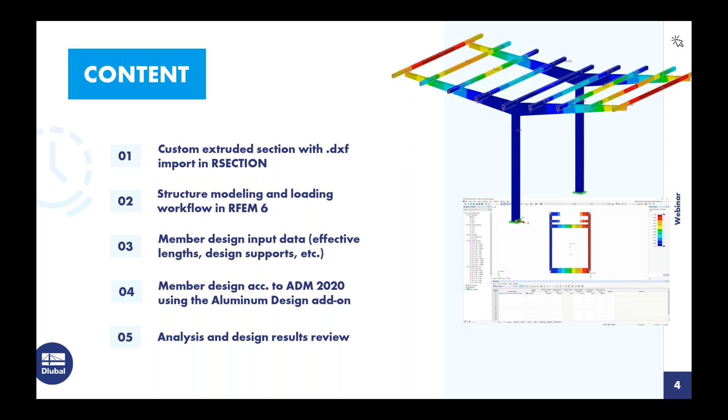We will also utilize the Aluminum Design add-on. This is an add-on that is integrated within the main program RFEM that allows us to perform the design according to the ADM 2020. RFEM will perform the analysis and the add-on will perform the design. Finally, at the end of the example, we'll take a look at both the analysis and design results.

So let us talk about a few new features that we have within RFEM 6 related to aluminum design when we compare this to what we previously offered in RFEM 5. As mentioned, this add-on aluminum design is going to be better integrated in the main program. In RFEM 5, we previously had to open up a dialog box, define information like unbraced lengths. In RFEM 6, we'll see that as we model the members, including the cross-section and the materials, we can also define immediately the effective lengths.

The topic of effective lengths has been completely revamped within this new generation as well. We'll see how we can define intermediate supports so that the effective lengths, or K times L, used for our unbraced lengths is calculated automatically. We've also added what we call design support.

If we take a look at our structure that we'll be modeling today, this carport, we have these small purlin members passing over the main cantilever beams. This is a rather complex situation for checking serviceability or deflections because we have a small cantilever at the left end, the right end, but in between the main beams here, the element is supported at both ends. We'll see how design supports can help us define more complex situations such as this.

Now, the next two bullet points here I will not be showing in today's example, but I think it was worthwhile to point out that we now can consider transverse stiffeners according to section G2 when we are looking at the member shear design. I'll point that out in the example today. Also, single angle bending can now be considered according to the geometric axes if all conditions are fulfilled according to section F5.1. Previously in RFEM 5, we considered single angle bending according to the principal axes only.

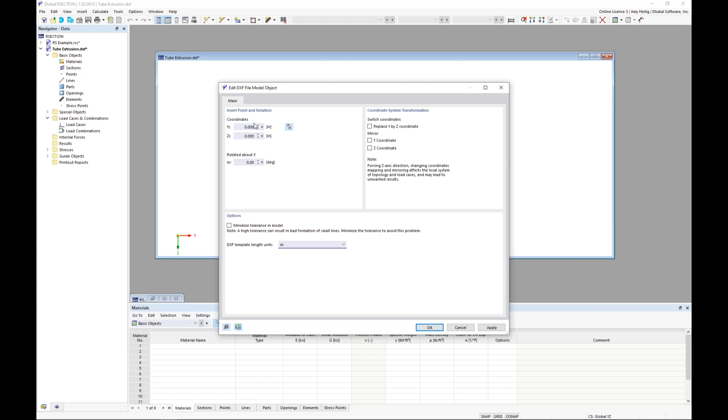We will begin in our standalone program, RSECTION, and I'm going to import a DXF file for my custom extruded section by going to File, Import, DXF. We'll select the DXF file saved to our computer. The program will want to know the units set within that DXF file, so we'll set this to inches. We're going to insert the DXF file at the origin, 0,0. We click OK through the dialog boxes, and we can see the line elements imported.

Now we need to take a couple steps to calculate the cross-section properties of this custom extruded section. I want to right-click on the model name to look at the base data. This is the dialog box that pops up when we create a new model, or in our case with the DXF import, we can revisit it. Notice the analysis method has two options: finite element analysis and thin-walled analysis.

Going back to RSECTION, we'll begin with the finite element analysis in our dropdown, so we click OK. What we want to create is a new part, so we go to our navigator and right-click on parts to create a new part defined by the boundary lines. The initial material needs to be set here - we may have a default material, or we can create a new one. I'll edit this default material by launching my material database.

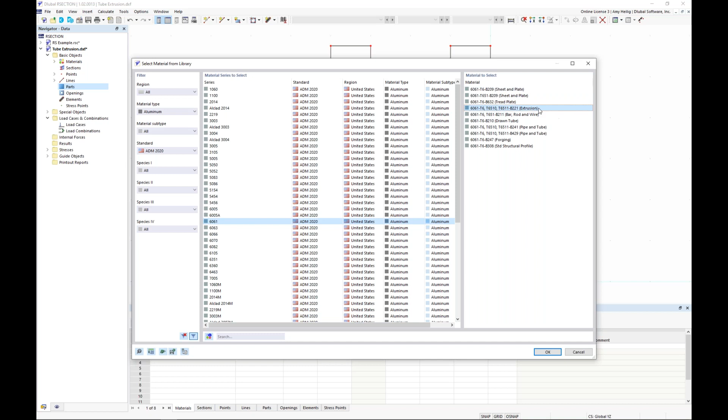On the left, we have filters where I can select aluminum from my dropdown, as well as the ADM 2020. Here are all the aluminum materials directly from the standard, including the 6061 category, and we can see the individual materials listed. For today's example, I'll choose 6061 T6 for extrusions. I click OK, and we see the material properties generated.

In the upper right, I want to use my arrow to highlight all of the boundary lines. Now I'm going to hold down my shift key to deselect the elements in the interior. When I click OK, we'll see our part generated, but of course we need to add in that opening in the center.

So what we'll want to do then is right click under openings to create a new opening. Same concept here where we'll choose our boundary lines. We can drag over those 4 center lines. I click OK, and now we can see our section is generated considering that opening.

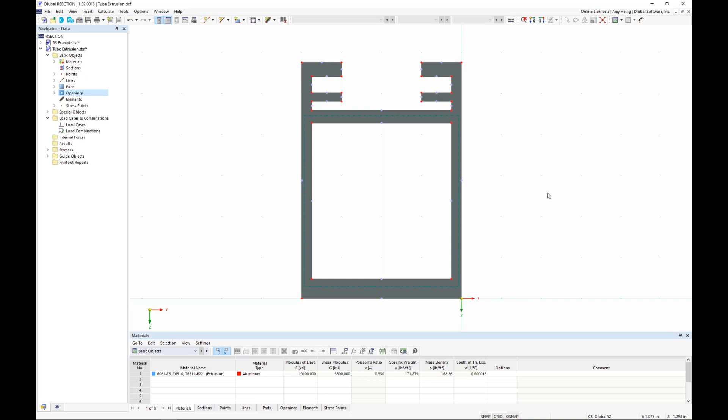And really that's all that needs to be done for this finite element analysis. I can go to calculate all, and the cross-section properties are immediately presented to me in table format here at the bottom. You'll notice that all of these properties can be saved with the model up here in the upper left-hand corner. This is what we would want to bring into RFEM, for example, for this custom extruded section according to the finite element.

Now, we also have some graphical options over on the left. We can also view the unit stresses here based on applied 1 kip load or 1 kip foot moment. So that would, again, be all that's entailed for that finite element analysis.

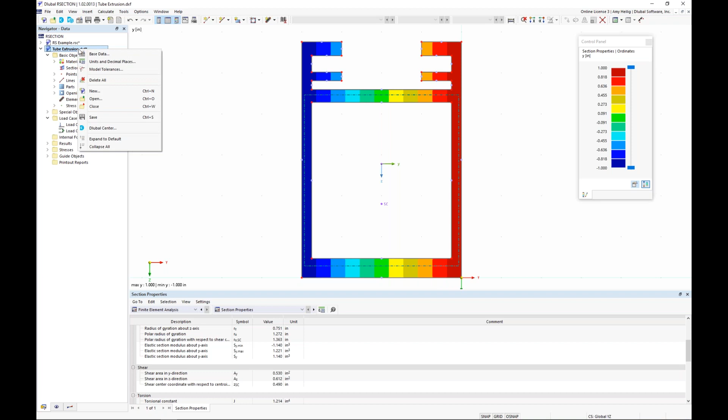But we want to take this a step further to consider local buckling once we do get into RFEM. So what I will do now is right click to go back to the base data and instead change the analysis method to thin wall. I click OK. Now everything you have seen up until this point is still applicable for the thin wall analysis. We have to create the part, we have to create the opening, but we take it a step further.

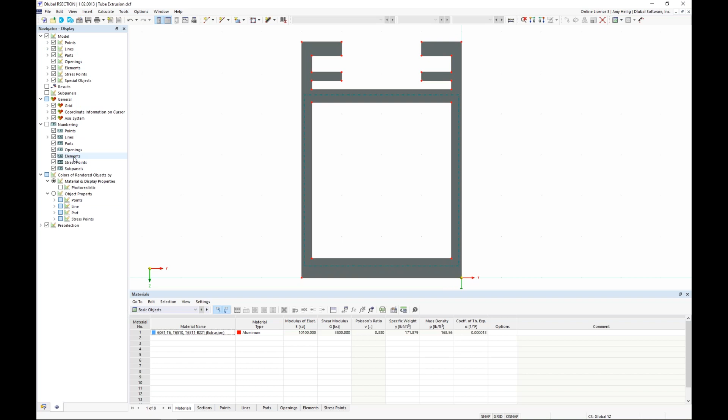By creating our elements. So I'm going to go to my navigator here and turn off my parts, turn off my openings. They still exist, I've just graphically turned them off. In order to create the elements, which will essentially be tracing over this section, what I want to do here is create some additional nodes that will guide me in generating those elements.

So I'll use my tool option up here at the top to create a new node between 2 existing points. I'm going to turn on this option here to set the node type to standard. This allows me just to click 2 nodes. I click apply and we see the 3rd node generated. And I'm going to do this at various points throughout this cross section.

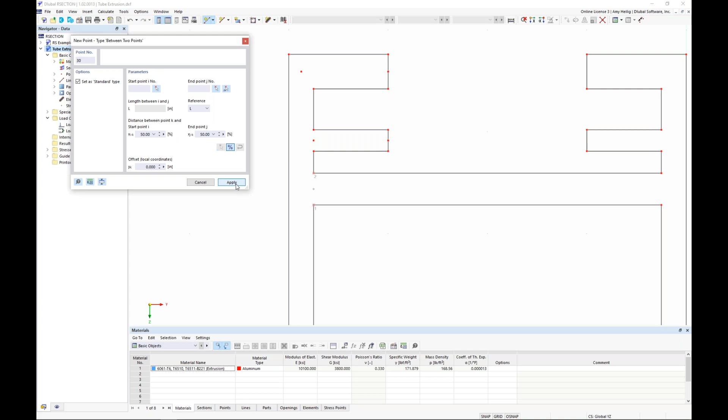Again, these are going to help me define my elements with the start and end node locations. We'll do so at this 3rd horizontal location as well as on the right side here, clicking my first point, my second point, and finally we have a couple points down here at the lower left that we would also like to generate.

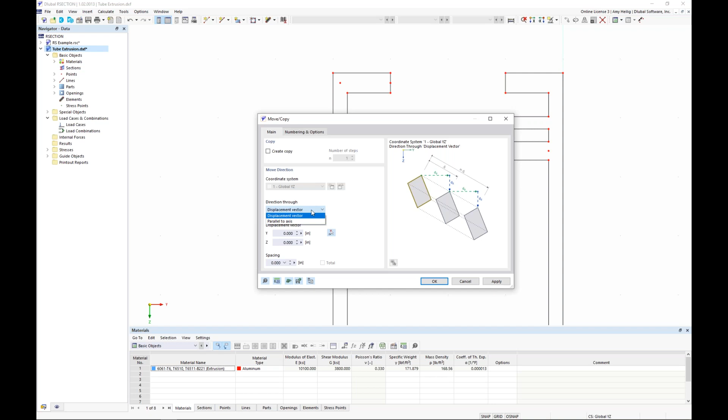Once we have completed the generation of the nodes, notice I'm not creating these same nodes on the right-hand side. We'll be able to mirror our elements from the left to the right-hand side to save us a bit of time. I'm going to hold down my control key to select both of these center nodes and use my move copy tool.

For this, I'm going to set the displacement direction parallel to the y-axis. Then I can use my measure tool by clicking on 2 points. I click OK, and you can see those nodes are simply moved to the center of these vertical lines. I'll do the same thing for this node on the right by selecting it using my move copy, and I just simply delete the negative sign to move that to the center line on the right-hand side.

So we'll begin by drawing our first element by right-clicking on the elements within the navigator to create a new element defined by a single line. Within this dialog box, we can take advantage of the option to measure in order to set the thickness. So I can select 2 of these nodes to set the thickness automatically. Then I define my start node, my end node. I click OK, hit apply and next, and notice in the background that first element was created.

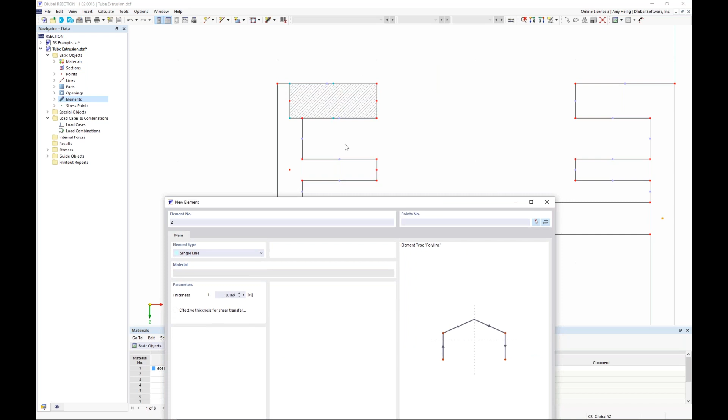We'll do the same thing for our second element by taking advantage of the measure tool. I set my beginning node on the left and my end node on the right. I click apply and next. We have our second element created.

We will set the measure option here for the longer horizontal element, and my start node will be on the left of the cross section, end node on the right. I click OK, apply and next. Finally, we have our last horizontal element, which I will use the measure tool once again at the bottom here from center point to center point.

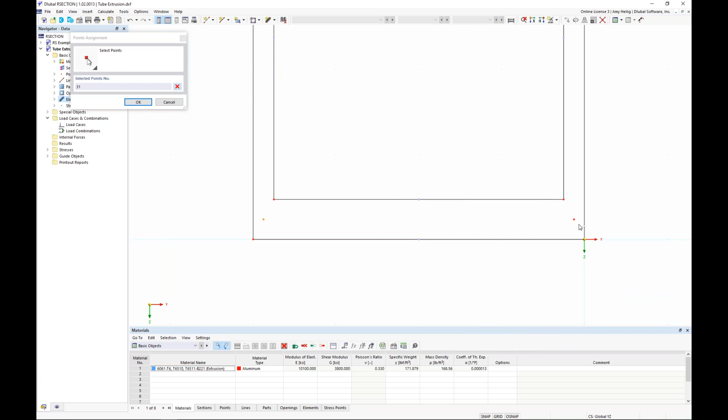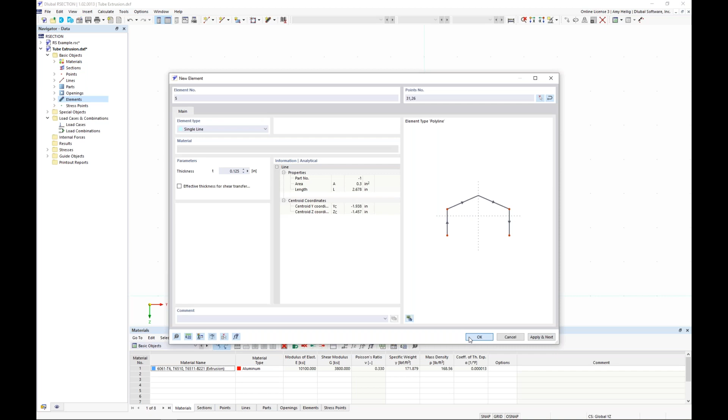And my nodes will be on the left and on the right. So that takes care of all the horizontal elements, but I do need to create the vertical element on the left-hand side. We also have the ability simply to type in the thickness directly, 0.125 inches, and I select my bottom node here and my top node. I click OK, and we should see that vertical element generated.

So I will select the vertical element, hold down my control key to select the smaller two horizontal elements at the top, and I will take advantage of my mirror tool. Exactly like what we would see in AutoCAD, where I can create a copy to mirror about the z-axis, and I can graphically select my mirror point anywhere along the center line of this cross section. So when I click OK, we now see the elements mirrored to the right-hand side.

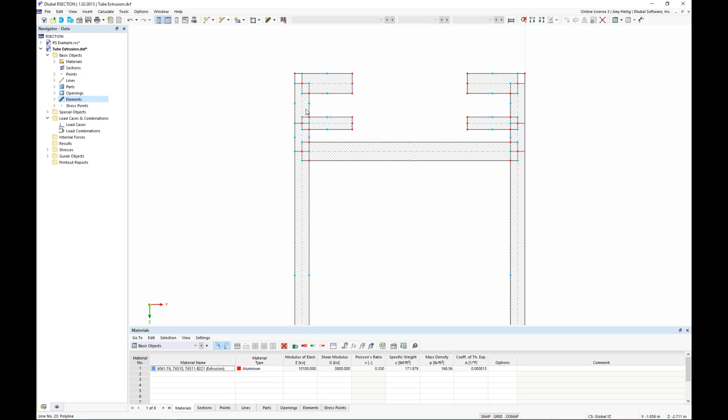So one final thing to do is we need to apply this tool up here to connect the lines and elements. What I will do is select the box over the entire cross section here. Notice when we do this, it's now broken this vertical element into segments. This is just so that the program detects where these horizontal elements will connect to the center line of the vertical elements. So now the generation of all of these elements is complete.

We can click calculate, calculate all. We will now see the cross-section properties generated based on the thin-walled analysis. A lot of these properties will be similar or very close to the finite element analysis, but perhaps if we take a look at torsion and warping, we might see some differentiation there. Because these are based on the elements rather than that part created underneath what we're visually viewing here. So we would want to save this with the results somewhere on our computer so that we can bring this cross section into RFEM.

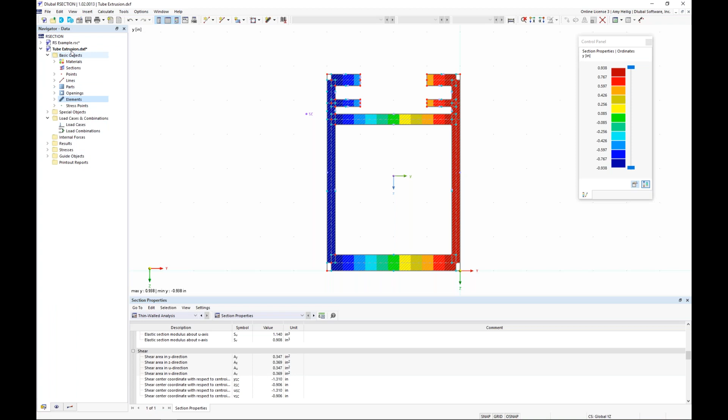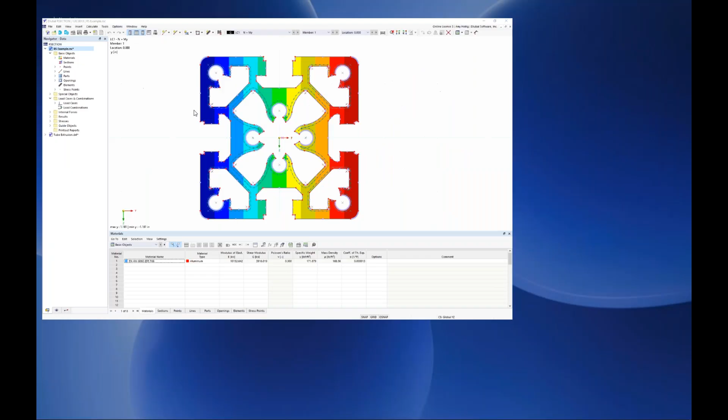Okay, so we will begin here in RFEM by taking a look at our base data. The base data would come up when we generate a new model. You can see here the model name would be set, the type of model is set to 3D. Under our second tab, these are all the various add-ons that are optional that you would purchase with your RFEM license. And today we'll be working with the Aluminium Design.

So you can see I have this turned on. I also have activated the wind simulation. This will be taking advantage of our other standalone program, RWIND, for a CFD wind analysis for this type of structure. So we'll see that a little bit later on.

Under the third tab, this is where we set the standards that we would like to use for design. You'll notice initially at the top, we want to generate our load cases and combinations according to the ASCE 7. You'll find here the NBC and many other international standards. The Aluminium Design here is set to the ADM. We also have the Eurocode available. For the ADM, we will be using the 2020 version.

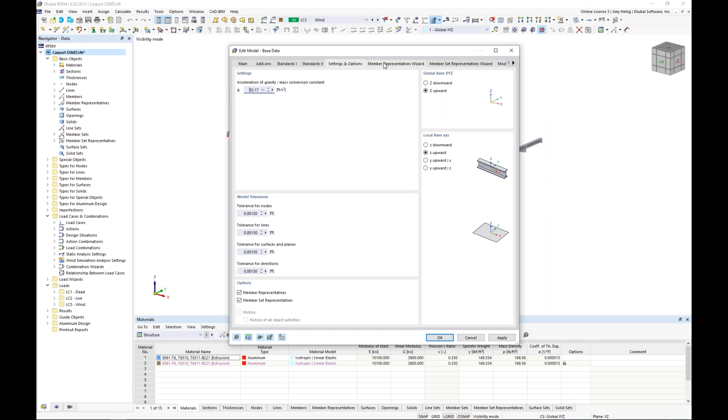Under these settings and options, this is where we can orient our local and global axes. You can see that mine are set to upward. I also have turned on what we call the member representatives. Once we turn this on, it will populate a couple different tabs up at the top. This is going to group together members that have similar materials, cross sections, lengths, so that we can better input data for the group of members rather than having to individually set or modify this input information for each individual member. We'll see how the member representatives can help us today.

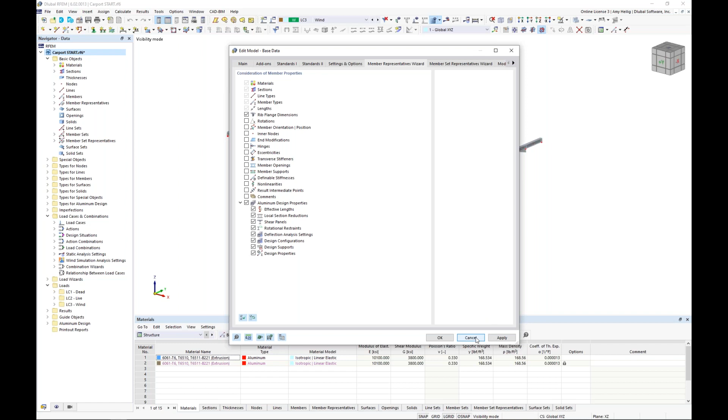So once we have defined all of this data, we'll go back into the main program, and you can see, for the sake of time, I have already modeled our carport aluminum structure here.

I've also applied the loading that we'll go through. Let us take a look at the various cross sections and materials that we have defined, beginning here by looking at one of the columns.

I double click on this column. You can see the member type is set to beam. Under the second tab is where we can set the cross section, and when we define one, we can visit our cross section library.

We have several thin-walled options here. So if your custom aluminum section fits into one of these categories, then you really don't need to use RSECTION at all. But for anything outside of this, it might be advantageous to make use of that standalone program we were just in.

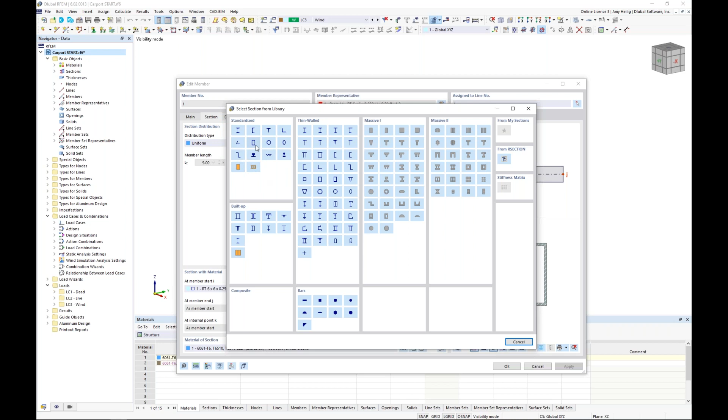But of course, we also have these standardized sections directly from the ADM. For example, if we take a look at the hollow sections here, similar to the material library we saw in RSECTION, we have our filters over on the left where we filter to the United States and to the ADM 2020, and we see our square tubes available directly from the standard as well as our rectangular tubes.

We will also set the material within this same dialog box. I have set all members today to that same material we saw in RSECTION, the 6061 for extrusions, but your materials may vary depending on which cross sections you're using. We can always access the material library here in the lower right-hand corner, and it will look exactly similar to what we just saw.

We also have, back under this main tab, the design properties. Notice this is turned on, which is relevant to that aluminum design add-on. This tells the program that not only do I want to perform the analysis within the main program RFEM, but I want to take advantage of this add-on to also perform the design according to the ADM 2020. When I turn this off, notice multiple tabs at the top disappear, and we will only be using this member for the analysis.

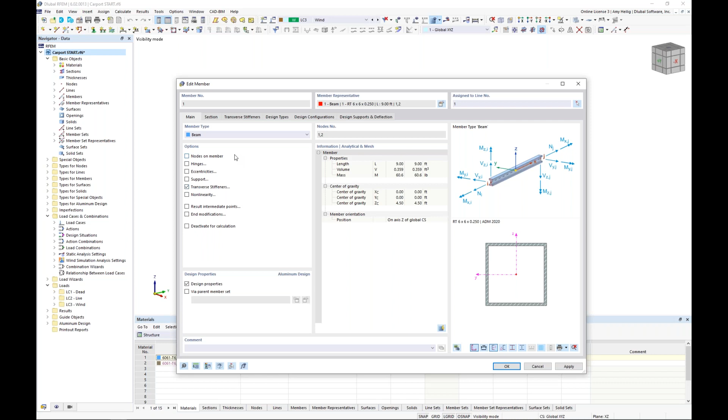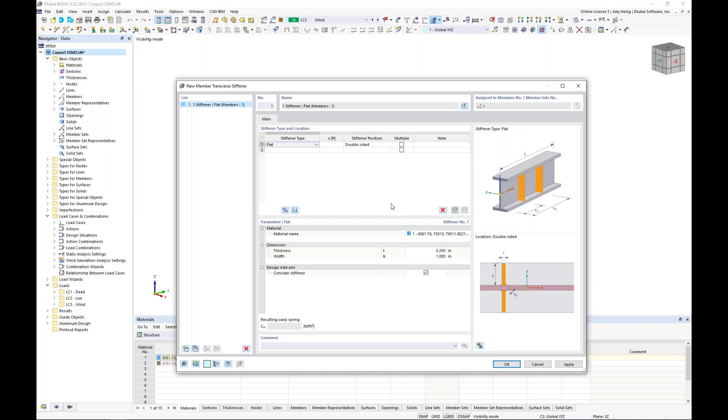I had also mentioned in the PowerPoint the transverse stiffeners. This is a checkbox you can turn on, and we get an additional tab where we can define a new transverse stiffener type, for example some type of flat plate, and define along the length where these flat stiffener plates might be located. We can apply multiple plates, define the material and dimensions, and that will be considered within Chapter G, the shear design of the member. Not so applicable for our example today, so we'll leave this off.

Looking at our cantilever beams, I will double click on these to go over what we have going on. Same thing, member type is set to beam, but notice under this section tab, the distribution type is set to linear. We have a deeper cross section where it connects to the column, and then we're going to linearly transition into the smaller section here at the cantilever end.

We do this by setting the distribution type to linear, and then defining two different cross sections at the member end and member start. Beginning with the member end, if we take a look again at our cross section library, I have defined this as a T-shape. We find T-shapes by using our filter on the left, and all the various sections are shown here, so I would go ahead and save this particular section.

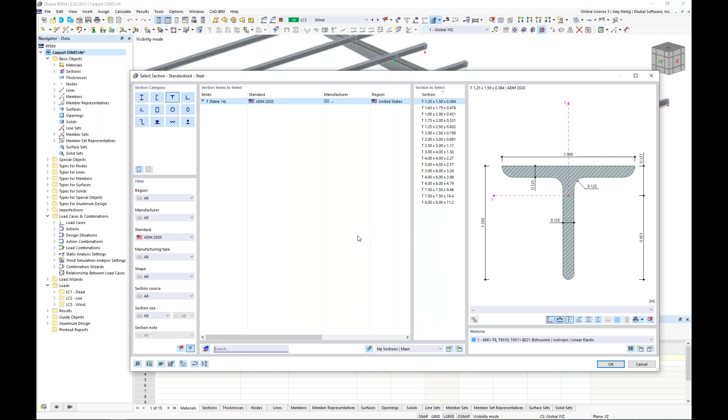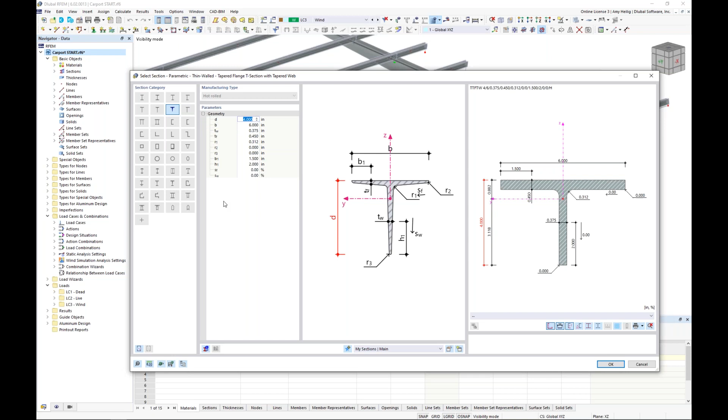Now for the member start, I also created a new section and selected again my T-shape, but we have a nice feature in the lower left corner where we can take any one of these standardized sections from the code and convert it into a parametric section. All of the properties from that standardized section are brought into this dialog box, but I can make modifications such as the depth, maybe setting this to 12 inches or 10 inches. Once defined, I would save that cross section, and then define the two different sections at the member start and member end.

Also under this particular member, you'll notice here that the design properties are also activated. That's all that I wanted to cover for this particular member.

Now, lastly, we have our custom extruded section, and this comes from RSECTION directly. I'll zoom in here and maybe turn this into a solid rendered view so we can see the true rendering of this cross section that was brought in from RSECTION.

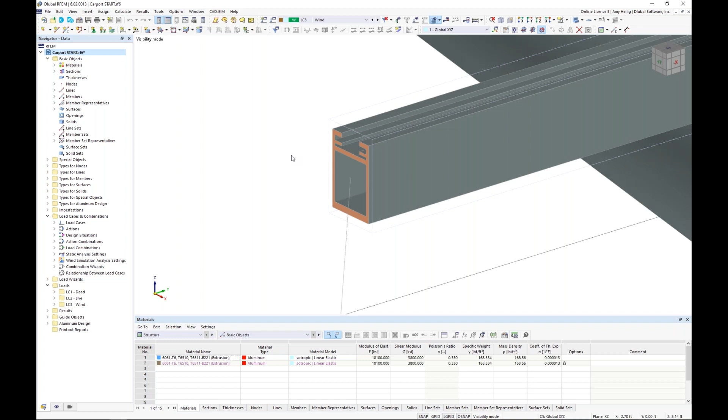Let's go ahead and double click on this particular member, selecting a new cross-section from our cross-section library. Over on the right-hand side, we can directly import one of those files, making sure it has the saved results. We can bring in those cross-section properties, and like I said, even the rendering is there.

What else you'll see here under the main tab is that I have activated the eccentricities. For each one of these purlin type members, I have created a member eccentricity here to offset it to the top of that tapered cantilever. With these eccentricities, I have set the bottom of my RSECTION member offset relative to member number 3, the top of member number 3.

The advantage of using this option for eccentricities relative to a section is that when I make changes to the cross section, either my custom extruded section or member number 3, that eccentricity is automatically updated. If I choose one of these other options where I manually define the eccentricity, then if I make any changes, I have to go back in and modify that eccentricity as well. So certainly a useful feature.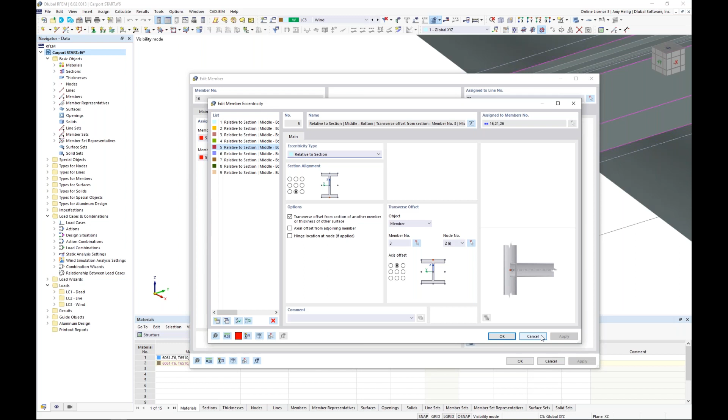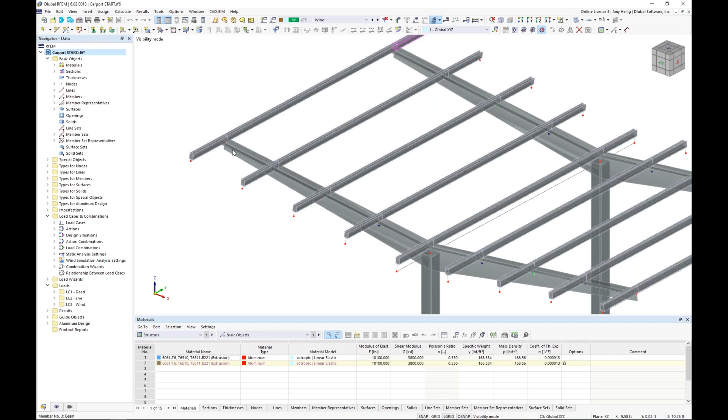We also will take a look at these small purlin members here and notice that they are broken apart into 3 segments. Just with the complexity of the linear member and the eccentricity, in order for the program to detect here that these elements are connected, I had to break them apart. But we still want to design these members as one continuous member, and that's not a problem in the program.

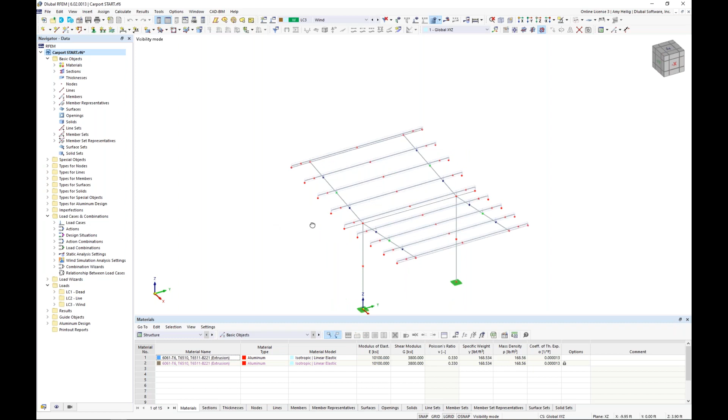The reason why is because we have what we call member sets. I can highlight the individual segments here in the center, hold down my control key to select the left cantilever, the right cantilever, and when I right click under the members option, I have the ability here to create a member set. The program is intelligent enough to determine which elements are continuous to create those individual member sets. When I do, and I zoom in here, what we'll see is a faint dotted line kind of grouping these 3 elements together.

So now we can design the member sets instead of these individual member elements. We even see them listed out here in our navigator over on the left, each one of the member sets that the program automatically created.

Okay, so that gives us a general overview of the various cross sections and materials. Now I would like to get into the information that is relevant for the aluminum design specifically, and we'll begin with the effective lengths.

Now I could go in here to begin with my column by defining the effective lengths, but remember when I was in the base data in RFEM, I turned on what we call the member representatives. The member representatives are now shown over here automatically in our navigator. It is grouped together similar members with cross sections, materials, lengths, and so on.

So under the member representatives, we have our first group here for the columns. When I double click on the member representative, we have the exact same tabs available to us that we do for the individual members. So when I go in and define an effective length, what's nice is that if I make any changes to the effective length, it will now be applied to both members 1 and 2, rather than having to individually go in and change each member.

So let us begin with the effective length definition here. I'm going to create a new definition type, and you can see that this is all related to stability. We have flexural buckling for the strong and the weak axis, torsional buckling, and lateral torsional buckling. For lateral torsional buckling, we have 3 analysis options here.

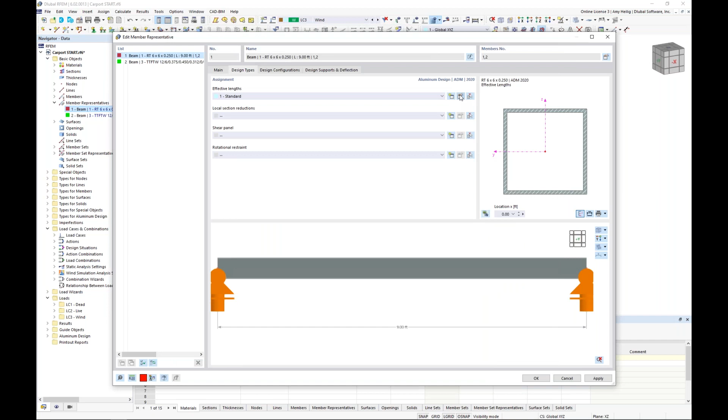For this second tab, I always like to make this first definition, click OK, and go back in to edit it. The reason why is because now the program detects that this particular effective length definition should be applied to members 1 and 2, and this allows me to turn on a quick little view here directly in this dialog box of these two columns.

So here is where we set the intermediate supports, and the intermediate supports will allow the program to automatically calculate the effective length, or K times L, to be used for the design capacity. And we're only looking at flexural buckling in the strong and weak axis direction.

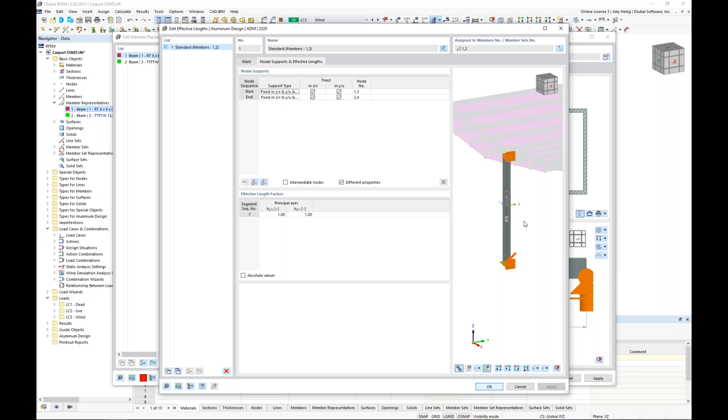So for this column, we'd probably want to assume that into the page, out of the page in the local z-axis direction, it really should act more like a cantilever. But into the page, we have this additional column here on the right, so maybe this would be supported in that direction. What we can do is, at the member end, deactivate the support in the local z direction, so now that's acting more like a cantilever in the strong axis.

Below, we will see the effective length factors, which default to 1.0. Now, if we'd rather not define these individual nodal supports and just manually type in what K times L is, you can always do that by turning on the absolute values here. When we turn this on, neglect these options at the top, because we're going to override them directly with the effective length KL in the strong and weak axis direction.

Now, for our example today, we certainly want to take advantage of these, so we will go ahead and leave the intermediate supports set here, so we can see our picture update for our particular columns.

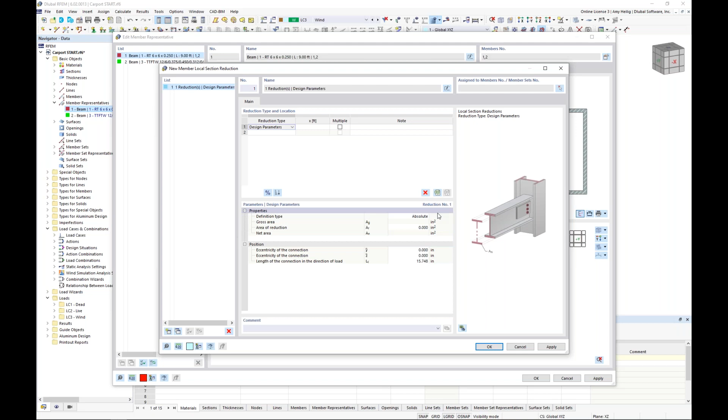The local section reductions, we can create a new definition type here. This is exactly as it sounds, where we can actually reduce the cross-sectional area, and we would want to define at which X location along the member length we would like to reduce the area. We can put in the area of reduction here in our table. This is all related to Chapter D, Design for Tension within the ADM, as well as Chapter G, Design of Shear. So if we have any reductions, we could input them here. Now we don't for today's example, so we'll leave that empty.

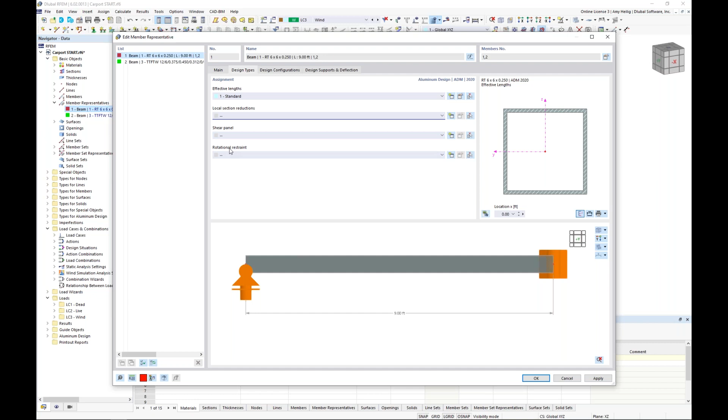Now, the shear panel and rotational restraint are strictly related to the eigenvalue analysis for the critical buckling moment that I mentioned for lateral torsional buckling. So probably quite often we won't be making any adjustments to either the shear panel or rotational restraint, so we can just go ahead and leave these empty.

The design configuration gives us two options, strength as well as serviceability, and we have two default options set here. So let us go into the configurations themselves to talk a little bit more about what we're setting.

So currently we have stability design turned on. We also have some limit values, and this just means that if our internal force falls below this limit that we've set here, we'll pretty much ignore it for the design checks. You can see the values are set quite low.

Most importantly, though, is the local buckling. The local buckling options given here are the three methods presented within the ADM, primarily used within Chapter E for compression design and Chapter F for flexure design: the weighted average method, the direct strength method, and the limiting element method. By default, this is set to the weighted average method, but you can go in and modify this here.

The second tab, stability, is related again to the eigenvalue analysis. It just tells us where we want to apply the loads. This is set at the shear center by default.

For the serviceability configurations, quite straightforward here, we are just simply setting the limiting deflection ratios. You can see the beam limit is set to L over 360, the cantilever is set to L over 180. Now for our carport structure today, this really isn't a building, so we're probably not so concerned with deflection. Maybe we want to decrease this quite a bit, using something more like L over 120, and notice the cantilever automatically updates to L over 60.

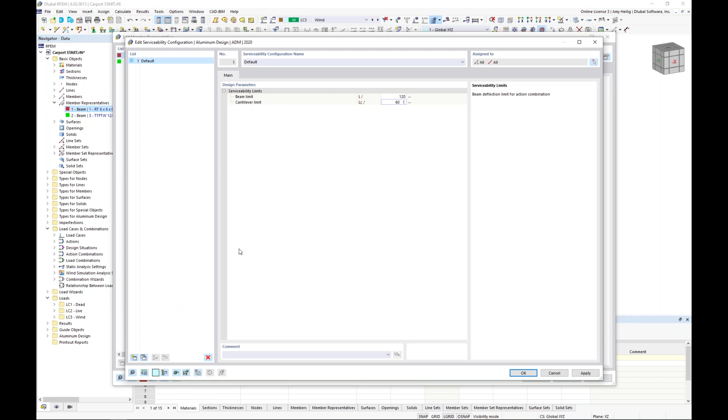So we'll click OK there. Now, finally, we have the design supports and deflection.

If I do absolutely nothing within this particular tab, the program is automatically going to assume that the member is supported at the start as well as at the end. But we know in this scenario we really want this member to act more as a cantilever, out of the page in the global X direction, but maybe it would be more supported at both ends when looking at the global Y direction.

So we do this by setting what we call design supports. I will create a new design support at the member start. The type is set to general, and I'm going to support this only in the local z-axis. We do need to give it a support width, and this is pretty arbitrary - it's not going to be used for the design. We're purely just setting this width, and the support depth is automatically calculated by the width of the member, and it's going to be active for deflection design.

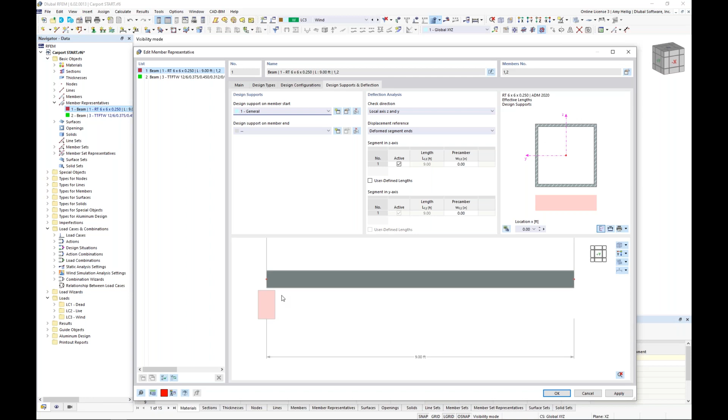Now, I'm not going to set this in the local y-axis, so we'll go ahead and leave that off. When I click OK, what we see here is this element supported in the local z-axis direction, so it will be referred to more as a cantilever, and the L/60 limiting deflection ratio will be applied. In the local y-axis though, it is going to be considered supported at both ends, so that L/120 will be applied.

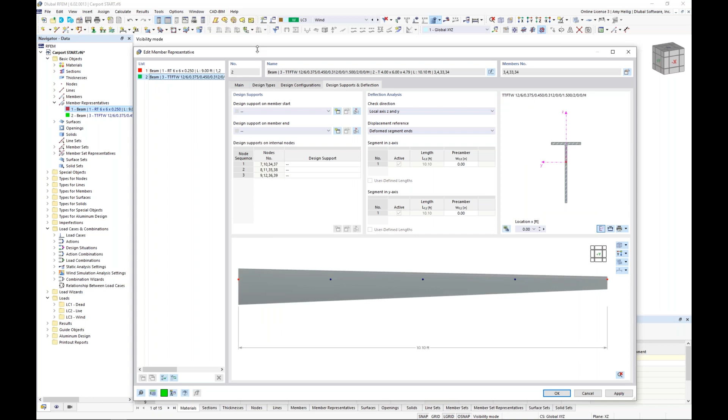So once we are done defining this input data for the aluminum design for our first member representative, we also have the second set shown here within the same dialog box. This is for my 4 cantilever tapered elements. So we'll begin with the design types here for effective lengths.

We will want to create a new definition type, and for this, remember, I like to click OK and go back in here to edit it just so that those members are now detected for this particular definition type. We will leave on the flexural buckling for strong and weak axis, as well as torsional buckling and lateral torsional buckling according to the eigenvalue method.

Under the second tab, we will turn on our little view here in the lower right-hand corner. By default, the program sets these restraints at the member start and the member end, and we know that's certainly not correct for this cantilever. So what we would like to do is for the program to detect these intermediate nodes where those purlins are framing into the top flange at the top of this tapered beam. So we can turn on intermediate nodes.

Then what I'm going to do is use this option here to select the member graphically. So we're put back into RFEM here. I select any one of those 4 members, and notice now I have additional rows here within my table because it's detected those nodes along the member length. So right here at the member start, you can see that the program has restrained this in translation in the local Z and local Y direction, as well as rotation about its own x-axis.

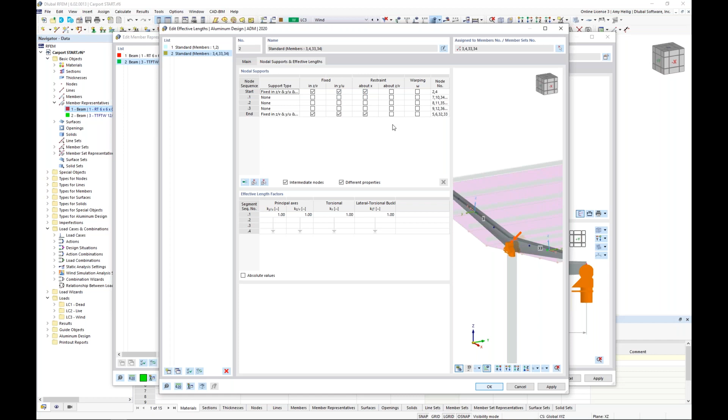So we'll go ahead and leave that as it's set. For the second node, we want to restrain only in the weak axis direction. Remember, this purlin is framing into the top flange, so we can also set an eccentricity here to the upper flange. The next node, same exact concept, the weak axis, but we add in this eccentricity to the upper flange. The third node, same concept here as well - we add in the eccentricity to the upper flange.

Now finally, our fourth node. By default, the program has restrained these degrees of freedom. Of course, we know this is not the case, so we will simply turn those off, and lastly apply that same eccentricity here to the upper flange.

So now when we click OK, what we see are those intermediate supports automatically applied here to the top of that tapered element. Jumping to the design supports, what we have here is certainly a cantilever, I would argue, in both the strong and the weak axis direction. Nothing is supporting it at the right end here.

So again, if we do nothing here, the program assumes that this element is supported at the start and at the end, which is not the case. So what we will do here is create a new design support.

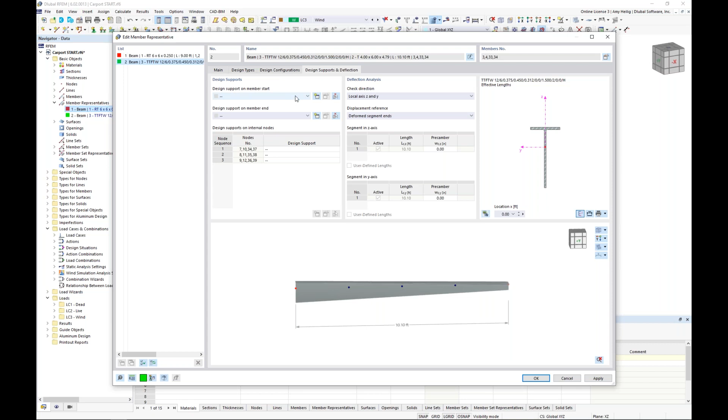The reason I'm creating a new design support is I'm going to take the same approach we saw for our columns by defining a support width of 6 inches in the z-axis, but I also want to turn it on in the local y-axis, adjusting this to 6 inches as well. So now when I apply this second support to the member, the program will automatically detect that it's a cantilever in both of those orientations.

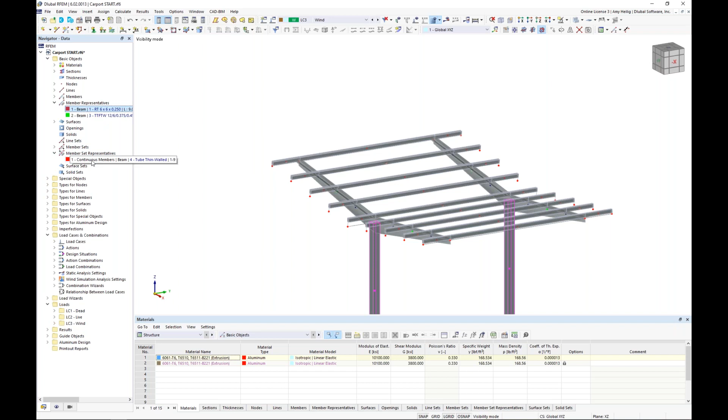Now that we've set up the input data for these two member representatives, we also have the individual purlins that we created as a member set. This member set has its own member set representatives located further down in our navigator, so we'll double click to apply the same workflow. It's just in a separate location because it's considered a member set rather than a member.

Under the design types, effective lengths will create this new definition type. I'll click OK and go back in to edit this one. I want to turn off torsional buckling and lateral torsional buckling, since this is more of a tube type section, so I'm not concerned with that.

We'll jump to the nodal supports and effective lengths. By default, the program sets these nodal supports at the member end, which is not correct - this is really a cantilever type scenario. So we turn on the intermediate nodes, and I graphically select, not the member this time, but that dotted line grouping these three segments together, so the program generates a couple more rows to detect those intermediate nodes.

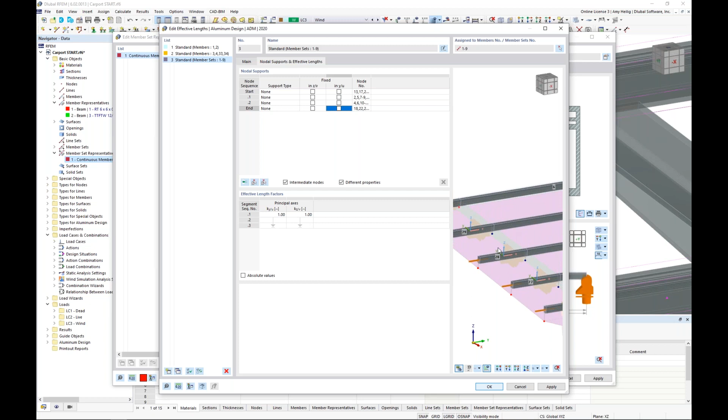At the member ends, I'll turn these off because we have a cantilever type situation. But where it frames into the tapered cantilever sitting below it, we'll restrain this element in both the strong and weak axis directions. Now we click OK, and we should see the intermediate restraints update to the interior nodes instead.

Now the design supports are interesting for this member as well, because we have cantilevers on the left and right, but really a supported type situation between the interior nodes. So even for this complex situation, we can take advantage of the design support definition, but this time for the internal nodes. I'll use my drop-down box to create a new design support one last time.

This time I'll give it a design support width of 4 inches, which is just the width of that T section sitting underneath it. I'll only activate this in the Z-axis direction, click OK, and now we see that design support activated. I'll use that same definition type for my other internal node, and now we see the design support on the right-hand side. So this will use L/120 for the segment between the two supports, and L/60 on either end.

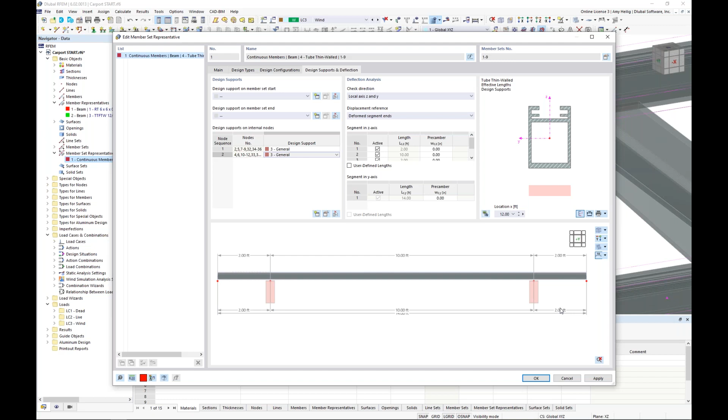So now I've defined the effective lengths and the design supports. What's nice is that in our navigator, under the display options, we can see that information shown graphically. For example, we have types for members where I can turn on the design supports. Maybe I'll switch to wireframe view, so if we're interested to see those design supports used for the deflection check, we can show them here.

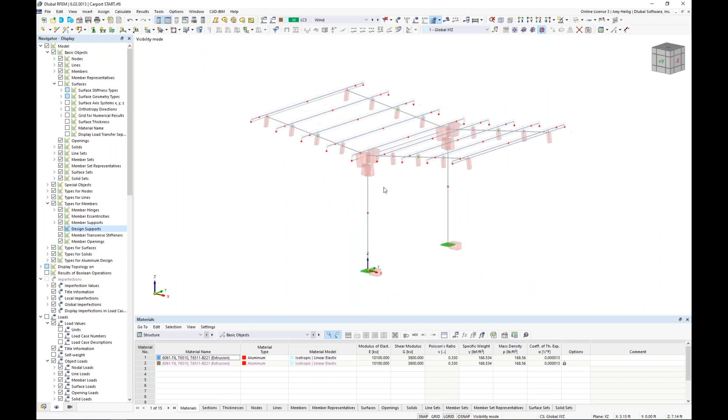In a similar manner, we have the types for aluminum design, and we can turn on those intermediate nodal supports that are being used for the effective length definition if we'd like to see them graphically. By no means are we applying these as supports for the static analysis - this is purely used for the design to determine the effective lengths automatically. We'll turn those off now, but I just wanted to point that out.

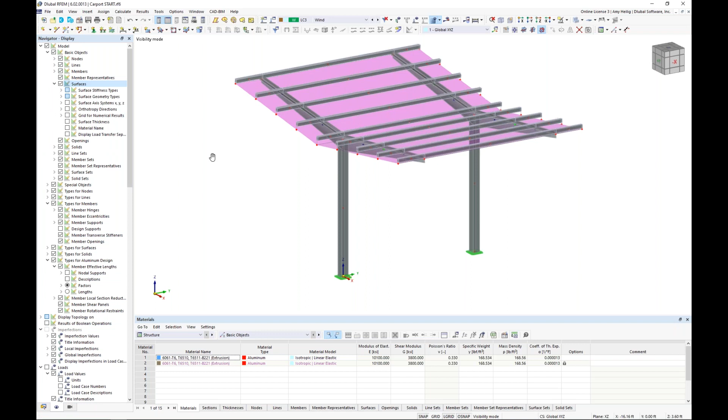All right, so we now want to take a look at the loading of the structure. For the sake of time, I had mentioned that I've already loaded this structure, and you'll notice I placed a surface on here at the left and right side.

The surface is a bit special because if I double click on it, it has this stiffness type set to load transfer, which is new within RFEM 6. It's not adding any stiffness to the structure. Notice the thickness and the material are grayed out; it's purely used to distribute loads to the members.

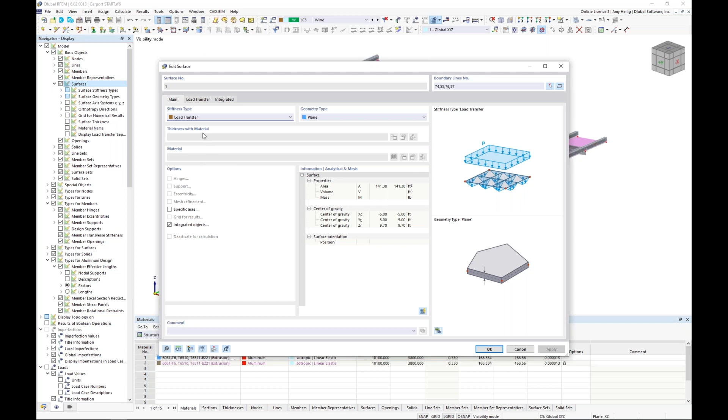Under the second tab here, we have load transfer. We can set this to one-way area load distribution based on the local X or Y axes, or two-way area load distribution based on both axes. I have this set to the Y axis.

So what this allows me to do now when I take a look at my applied dead load, which is just a simple surface load, is display the load transfer separately within my navigator display option. The program will automatically distribute the loads to each of the purlin elements based on its tributary area. We have two loads applied at the center element because there's a surface on the left and right, so it sees load from both sides. Now we can turn this off to go back to the display of the surface load.

Same exact concept for the live load. I just decreased the magnitude slightly to 5 pounds per square foot.

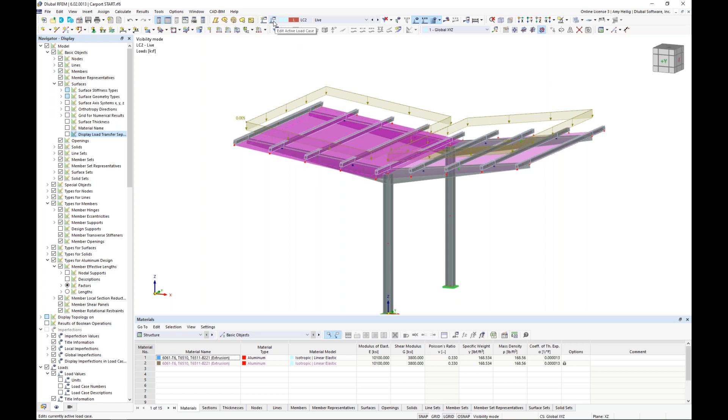Now, if we take a look at our load cases and combinations, here again is the dead load and live load applied. I also created a third load case here, so pretty simple application for today's example. But this wind load is a bit different than the standard static loads for dead and live load.

The reason why, if you remember, back under the base data I activated wind simulation. This is going to integrate with our standalone program, RWIND, for a computational fluid dynamic analysis, or CFD. It will take the structure out of RFEM, place it in this numerical wind tunnel, and we'll go ahead and see what the wind pressures are.

So why would we want to use this? Well, when we refer to the ASCE 7 for freestanding carports or freestanding canopies, there really is no guidance in the code on minimum wind loads. We're simply supposed to treat this structure like an open building. This could be a disadvantage in some scenarios because the minimum wind loads are much too high, or maybe too low. So it might be worthwhile using RWIND, the standalone program, as an additional tool to compare to the minimum wind loads set forth within the ASCE 7.

Notice here for this load case, the analysis type is not set to static analysis, but now it's set to wind simulation. Under the second tab, this is where we can control the settings. We can also set the wind profile. You'll notice I have this set according to the ASCE 7, so my wind velocity as a function of my structure height is shown over here on the right-hand side.

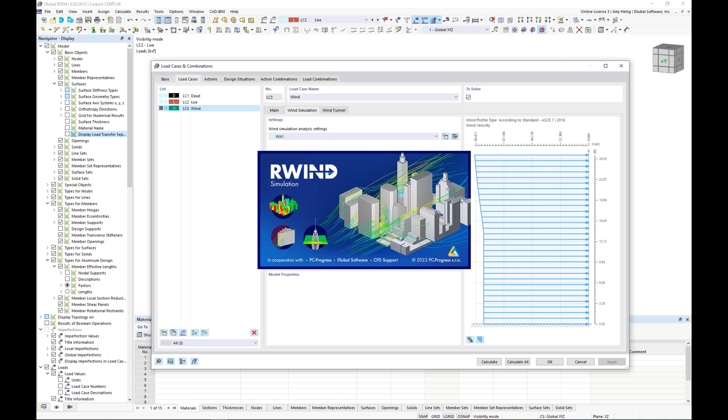Now, of course, we could get much more into this, but we don't have enough time for today. We do have webinars on our website dedicated entirely to RWIND. What I can do is take a look here using this button to calculate the RWIND model, and it will go ahead and launch RWIND as the standalone program. What you'll see here is that my structure was brought into this numerical wind tunnel.

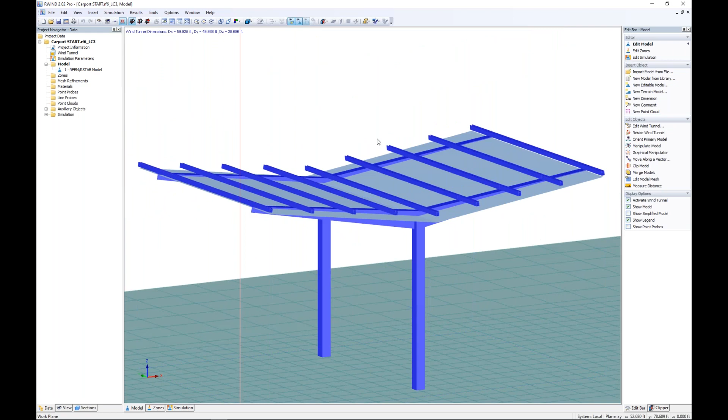If we zoom in here, even our custom cross sections are brought in. You'll see the tapered elements and of course the surface element shown here. Our numerical wind tunnel is indicated by this box, and we have the wind flow coming in from left to right here. Now I've already solved for this model.

So what you'll see eventually when the calculation is complete is the wind pressures on this carport. We can move our mouse around to view what the wind pressures are on our column elements. We can turn this upside down to view the underside of the carport and see the various pressures based on this particular analysis.

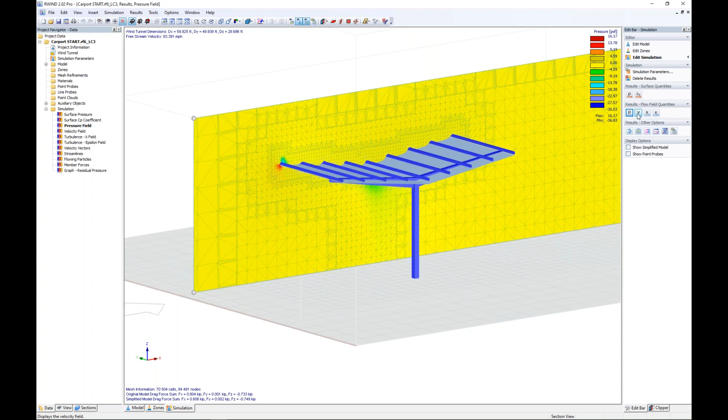We also can view the pressures in and around the structure, using our slider tool where you can move this back and forth to view the different pressures. Same concept for velocity, so we really see how the wind speeds up underneath the carport as well as up here at the upper left.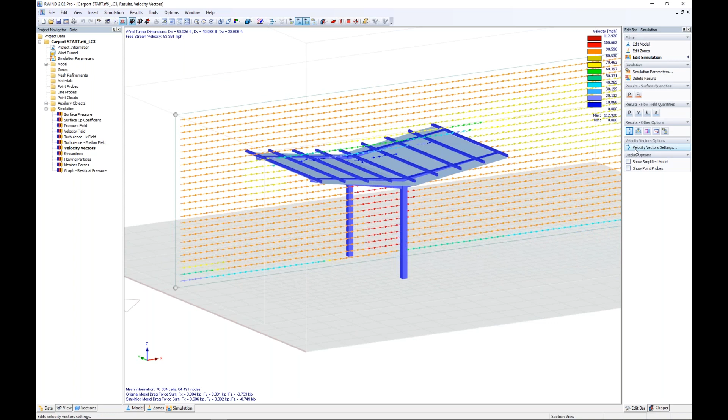And finally, we have what we call the velocity vectors. We can see, indicated by these colored arrows, the magnitude and direction the wind load moves around the structure, also turning on our streamlines. And everyone's favorite, these streamlines, we can also display as a flow animation, so we can see the particles hitting this structure, moving on and around it.

But ultimately, what we're trying to get out of this calculation is back to the wind pressures here. So once we're done with the calculation in RWIND, we can do all this underneath the hood without even opening RWIND at all. Within RFEM, we'll bring these loads back into the program, and we can combine with dead load and live load and so on.

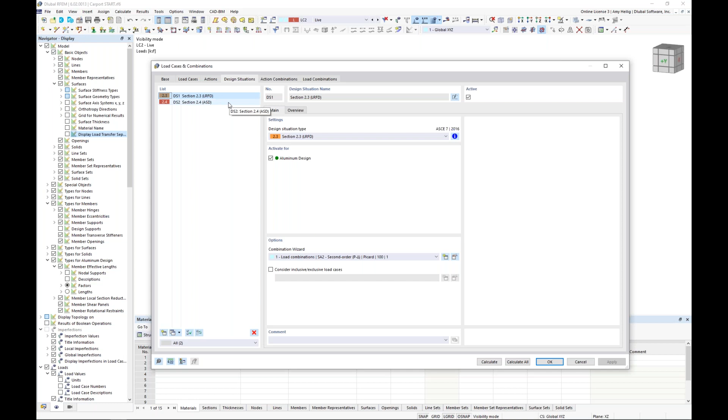Under the Design Situations tab, there are two design situations generated here, LRFD and ASD, and this is automatically done based on the ASCE 7 standard. LRFD is going to be our factored load combinations, and ASD is going to be our unfactored load combinations. You can see these are active here for our Aluminum Design add-on. Design situations are used within the design add-ons, and we can create multiple design situations, shown down here in the lower left corner.

Looking at the load combinations, we can see the individual load combinations associated with each design situation. So we have design situation number 1, LRFD, our factored load combinations, shown here in orange. And we also have our second design situation, our unfactored load combinations, associated with design situation number 2, shown in red.

So once we have defined our load cases, our load combinations, and we've applied the loads to the structure, we can take a look at those individual load combinations here in RFEM. We can view the loads applied to the structure. Here's our numerical wind tunnel directly from RWIND, here's the dead load, live load, and so on.

So we're almost ready to run our calculation, but remember the huge advantage of RFEM 6 is the integration of these add-ons, such as the Aluminum Design add-on, within the main program. No longer do we have to run a static analysis and then run a separate design calculation. We can do everything together.

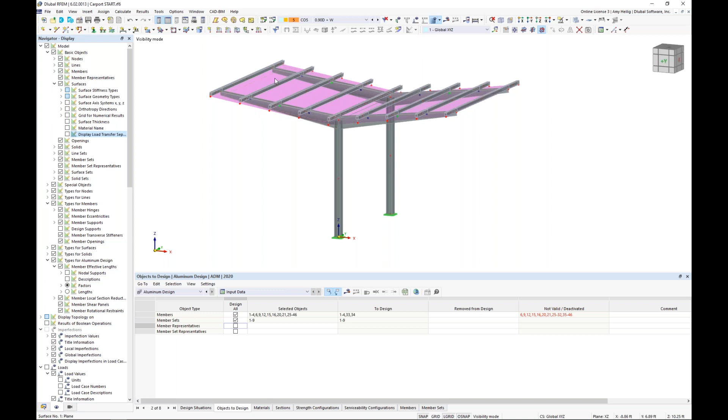Now, the second tab is the objects to design. By default, everything is turned on. So what I want to do here is turn off the design of my member representatives. I will design all member sets — if you remember, that's that custom extruded section we grouped together as continuous members.

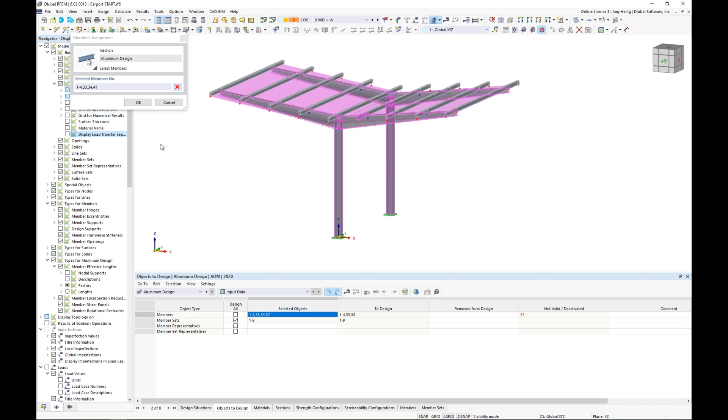For my member design, what I would like to do is graphically select — I'll clear out these options here — my two columns, and I will select my 4 cantilevers here. So we should see all of those members populated. I click OK, and I see one small error here, member number 41. Let's see which one that's related to. So the 2 columns here, and then we will have member 1 through 33, and then one final element here. Okay, that should be good.

All right, so we're only designing those members, which would be the 4 cantilevers as well as the 2 columns, and then again, those member sets.

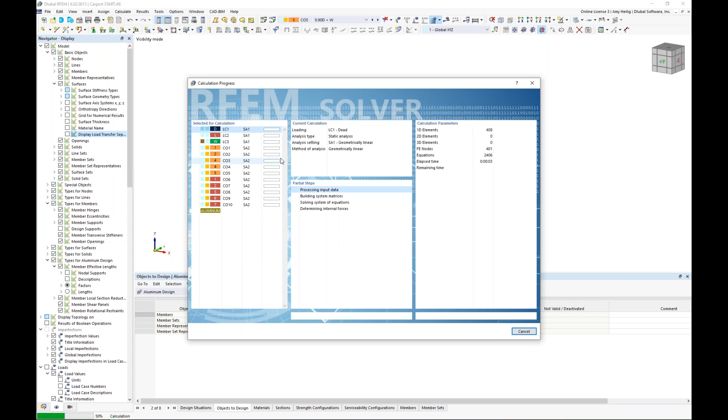So now we're finally ready to run the calculation. We can either run the calculation here in our toolbar, or we can go up here to calculate all, and this actually will solve quite quickly. We're running through our load combinations, using a multi-core processor on your computer, much quicker in RFEM 6. It runs a design according to the ADM, and we're now presented with our results.

So let us begin here with the static analysis. We now get a new tab within our navigator, and over on the left we have the static analysis option available in our dropdown. We can view the global deformations and scroll through these different load combinations at the top to see exactly how the structure is behaving under the applied loads, and see if it's as we would expect.

Now, of course, we're also very interested in the member internal forces. We can turn on, for example, the normal forces. We see pretty high normal forces for our columns, as we'd expect. We can take a look at shear forces in the weak axis direction, the strong axis direction, maybe bending moments, and as we expect, where these cantilevers frame into the columns, we have pretty high bending moments.

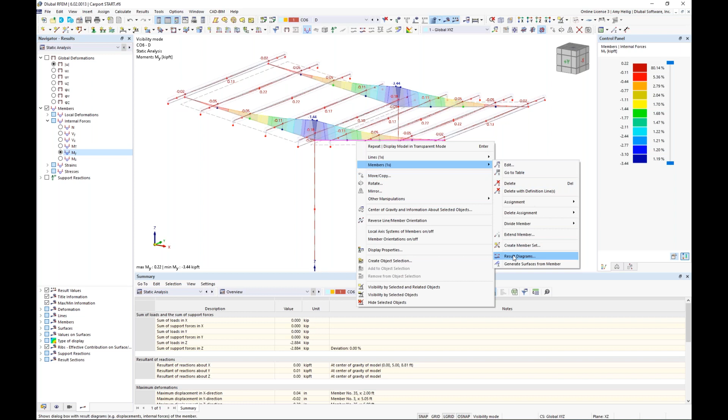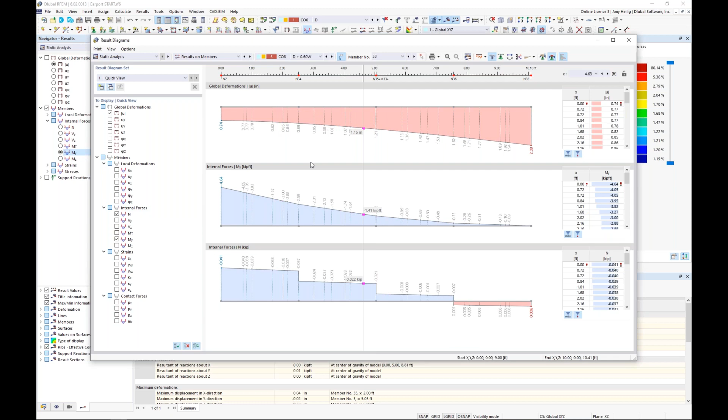For any one of these members in the static analysis, we can right click, and under the member options we have the results diagram. This will give us a little bit more information where we can turn on internal forces, deflections, whatever it may be, and show it in more detail along the member length. We can even scroll through to the different load combinations directly within this dialog box, and add this information to our printout report. New within RFEM 6 is that you can drag this over to your second monitor, and you'll be able to work concurrently in RFEM in the background.

So the static analysis is fairly straightforward, just viewing the information purely from the applied loads. We also have the same static analysis information shown in table format here, so you can view the results by member. Notice everything is synced up in the background to show me exactly where that controlling internal force is that I'm looking at in the table. It will point that out with a red arrow on that particular member. We can export this to Microsoft Excel for further sorting options. So everything is possible here.

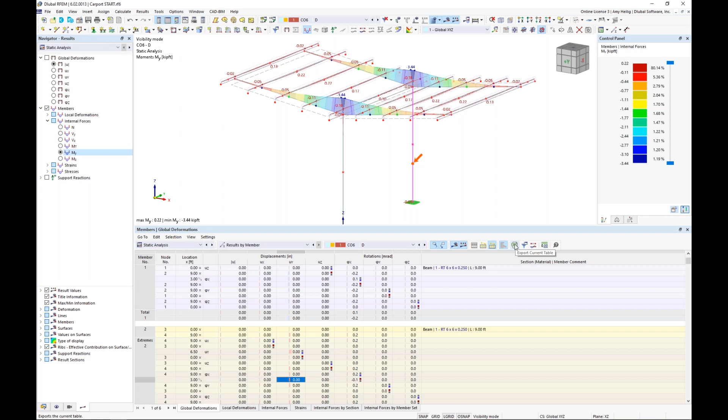Now I'd like to jump down to the aluminum design. Here we can take a look at our results by design ratios on members, specifically the design ratios by member tab. Notice once again the program is syncing up to the table here, so I can take a look at each one of these design checks.

For each one of these members, we are giving you every design ratio from every chapter. We'll see multiple design ratios from chapter E, F, G, H, and even L for serviceability. If you're thinking it's too much information and you're only concerned with the max design ratio, we can use our filter in the toolbar to filter to the max. Now we're only going to see the design ratios that are applicable. A lot of these are controlled by deflection, for example.

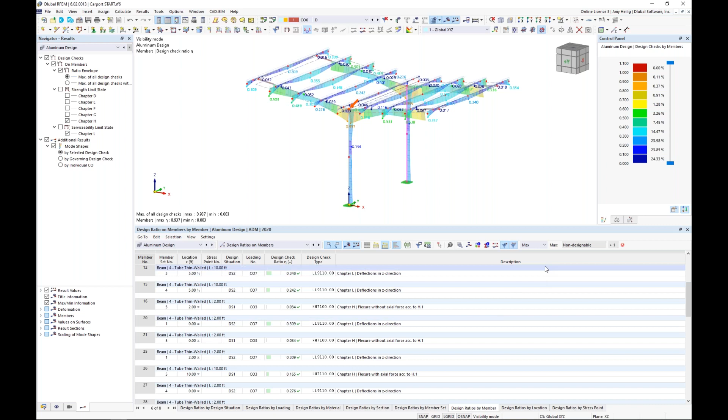But going back to no filter, I thought it might be interesting to take a look at the design ratios by the section. We go into our custom extruded section that we brought in, and sure enough, here for one of the checks is local buckling according to chapter F.

Also new within RFEM 6 is this design check details. This gives us the code equations that we can follow line by line, with the variables listed and code references on the left-hand side, just to understand where the ultimate design ratio is coming from, rather than it being a black box software. We can follow it line by line.

Because we ran this custom extruded section according to a thin-walled analysis and took the time to trace over that element, we're now going to get section classification here for local buckling. If we take a look at element number 5, for example, we can see exactly how that element was classified according to chapter B, and the local buckling checks will now be carried out according to chapter E and chapter F. We can also take a look at this option in the upper left, the diagram and section, so we can use our dropdown to view the stresses on this custom section. Currently we're looking at the normal stresses, primarily in tension, but we can use our dropdown box to view any one of these stress options available, including shear stresses as well.

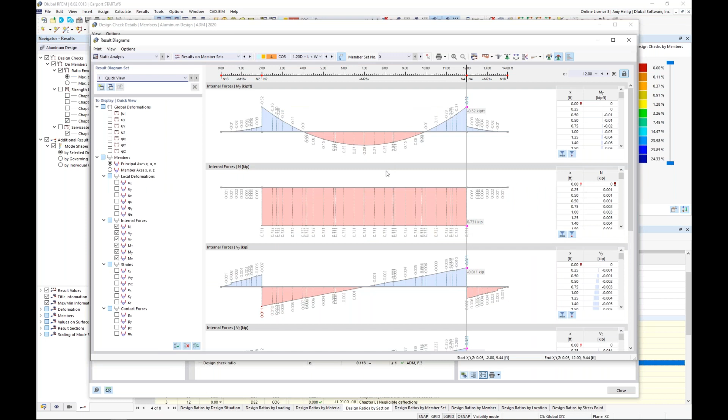So also within the same design check details, we can also access our result diagram. We already touched base on this, same thing that we saw from the static analysis, but if we'd like to quickly access the internal forces used for design, we can do so here. You also can get the various checks from the same X location. So if we jump to one of these other checks, from chapter F for yielding, again we're going to see every single equation listed out here and able to follow it one by one. So we'll go ahead and close out of this.

Now everything is visible in this table format, of course, but we also have some graphical options. Currently we're viewing the design checks, the ratio envelope, so essentially just the max of all design checks is currently what we're looking at on the structure. And we can compare this to our control panel over here on the right.

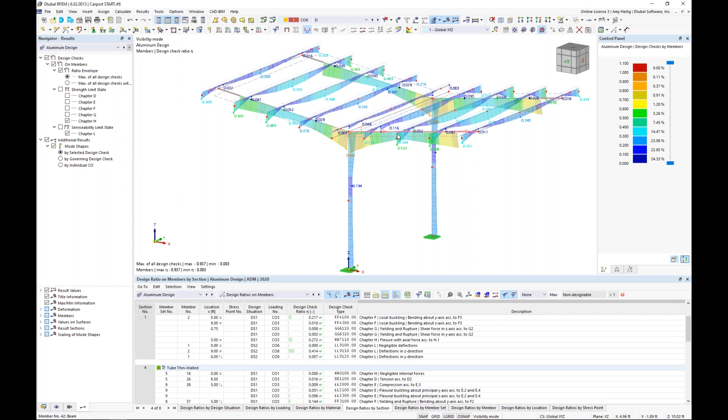What I thought would be interesting to show is if I take a look at this tapered cantilever beam, we'll create a visibility by the selected objects. I'm going to turn off the design check, and remember the rendered view looks something like this, but underneath the hood, everything is created as just a center line here. What we can do is take a look at this particular member for lateral torsional buckling.

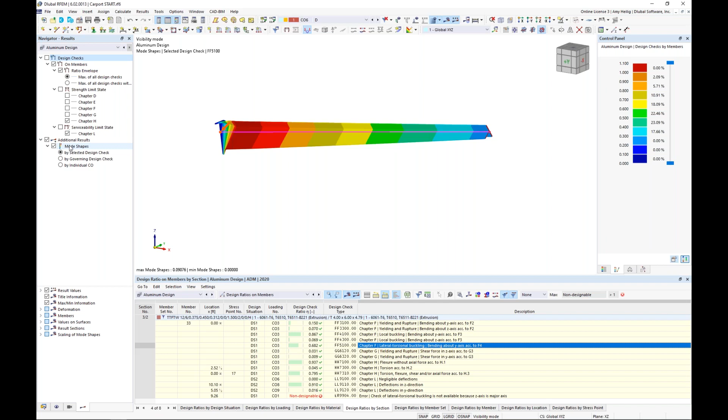And when I click on that option within the table, we're currently viewing the mode shape. So I took that eigenvalue analysis method for the LTB checks, and underneath the hood, this eigenvalue analysis is run to determine what the critical buckling mode looks like for this member before it fails. This is what we use for the capacity calculations for LTB. We can also decrease the factor a little bit, just to see in a bit more detail what's going on with this tapered element. So kind of interesting there as well.

Okay, so hopefully that gives you a better summary of just how we can create those custom extruded sections in our section, bring them into RFEM, and really run the full analysis and design for our aluminum structures.